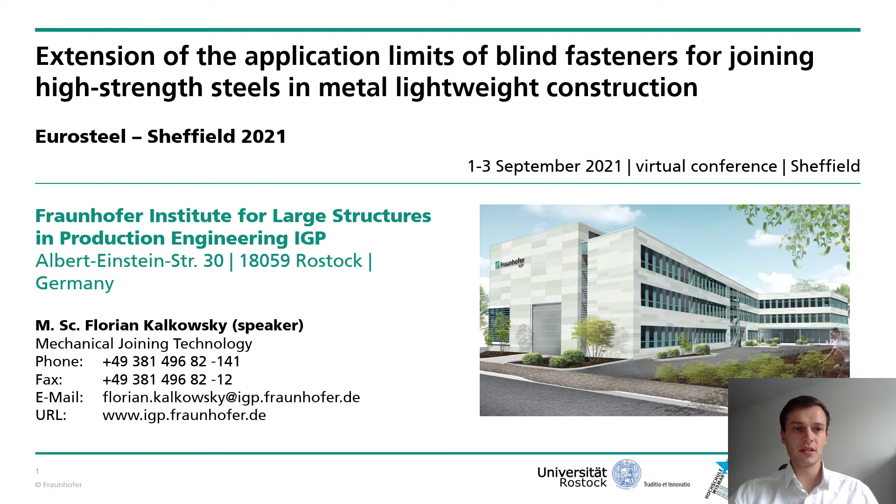First, let me introduce myself. My name is Florian Kalkowsky. I'm a member of the working group Mechanical Joining Technology at the Fraunhofer IGP Rostock, Germany. Today, I'm here to talk to you about the extension of the application limits of blind fasteners for joining high-strength steels in metal lightweight constructions.

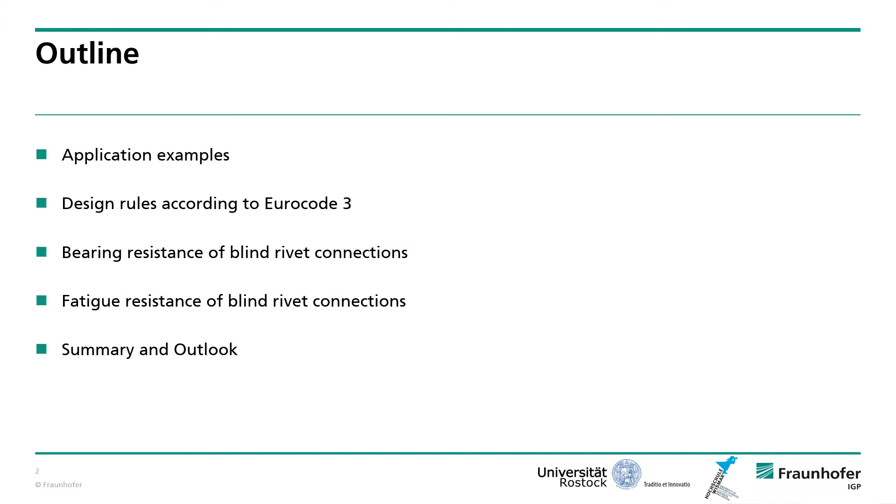During this presentation, I want to talk about the shown points. First, I want to start with some application examples, go on with the design rules according to the Eurocode 3, followed by latest research results from tests on blind rivet connections with high-strength steel to determine the bearing resistance and the fatigue resistance. And finally, I would like to give a summary and an outlook.

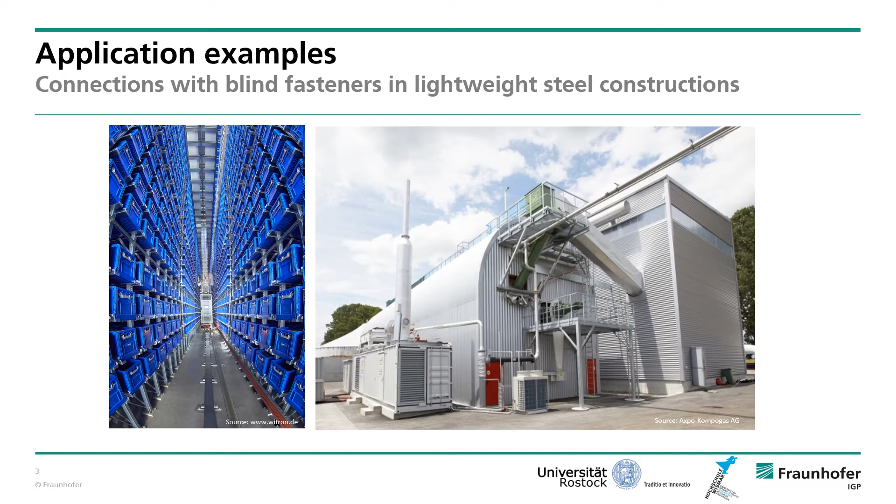And if we now look in a little bit more detail inside this construction, we can see that because of the used high-strength steel, we can realize small connection sizes, but with that fact, we have a problem with the static strength verification because it's not covered by the standard.

In addition, the equation to determine the bearing resistance is bound to additional limitations. For example, the components may only have a maximum tensile strength of 550 Newton per square millimeter. So this means that applications with high-strength steel fall outside this range. For the fatigue strength verification, it should be noted that there are no detail categories for blind fasteners and connections, and also the increasing material strength when using high-strength steel isn't considered in this verification.

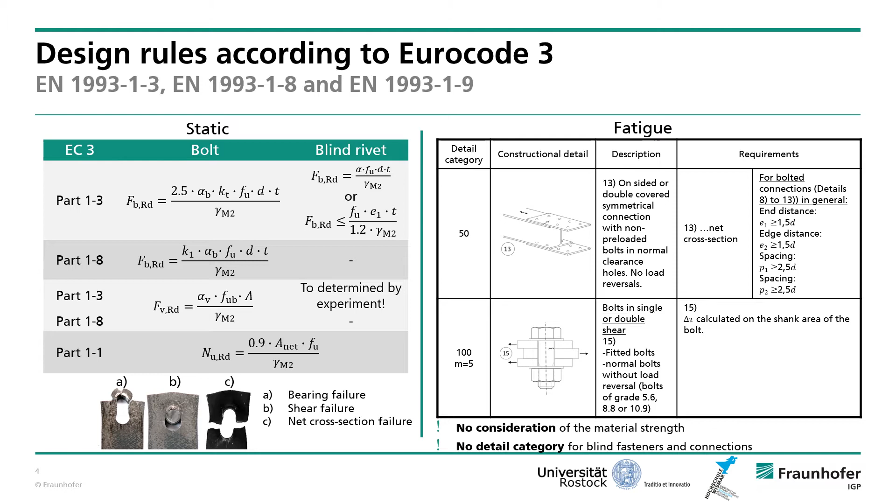The tested joints were single-lap and double-covered symmetrical joints where we used different steel grades of the sheet materials. The steel grades were S235 up to S700. For joining this sheet material, we used different types of blind fasteners. For the evaluation of the test results, we use the load bearing coefficient, which is the result of the maximum test load, the whole bearing area, and the observed ultimate strength.

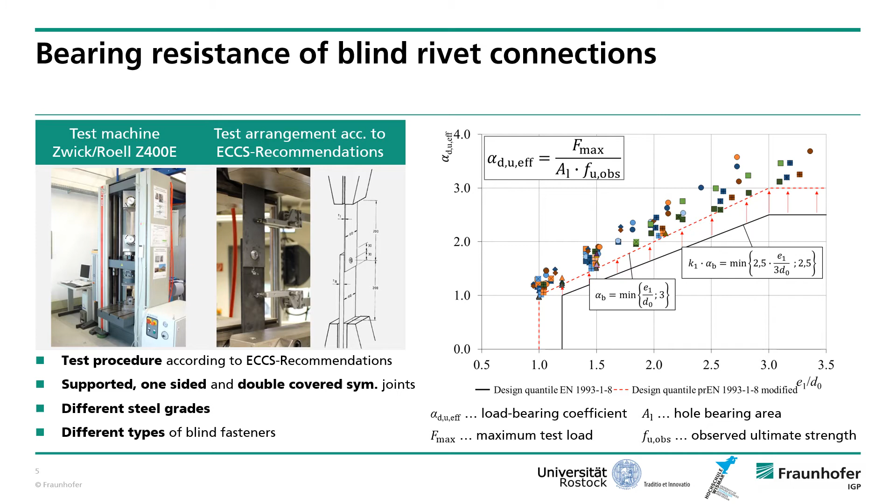And if we now compare this value of the load bearing coefficient with the design quantile according to the Eurocode 3 part 1-8, we can see all test results are above this design quantile, so we can sum up that the design rules for bolted joints or connections according to the Eurocode 3 part 1-8 are also applicable for blind rivet connections, in this case where we have a bearing failure of the sheet material.

Due to the missing detail category for blind rivet joints, we carried out fatigue tests to determine the detail category. As a reference, we used connections with a bolt where we have a detail category according to the Eurocode 3 part 1-9.

Furthermore, it was assumed that when we use high-strength steel for the sheet material inside the joints, we have an increasing fatigue resistance, which is currently not taken into account by the Eurocode 3. So this had to be proven by tests.

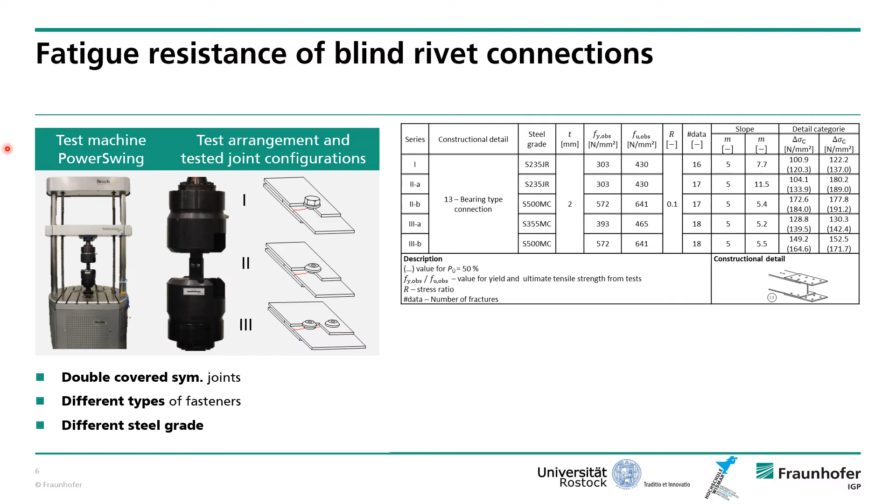If we now have a closer look at the test results and their S-N curves, we see there's a clear deviation of the fatigue resistance in our fatigue test, and the resistance value of the detail category was a value of 50, and also the slopes from the statistical evaluation deviate significantly in comparison to the normative slope with m equal to 3.

If we now compare the values of the detail categories between series 1 and 2, so the series where we use the bolt and the blind fastener inside the joint, we can see, okay, they have a similar fatigue resistance with a value from 100 to 104. And if we now use a high-strength steel inside the joint with blind fastener, the fatigue resistance increased from 104 to 172. So there is a direct link between the used material strengths and the fatigue resistance of the joint.

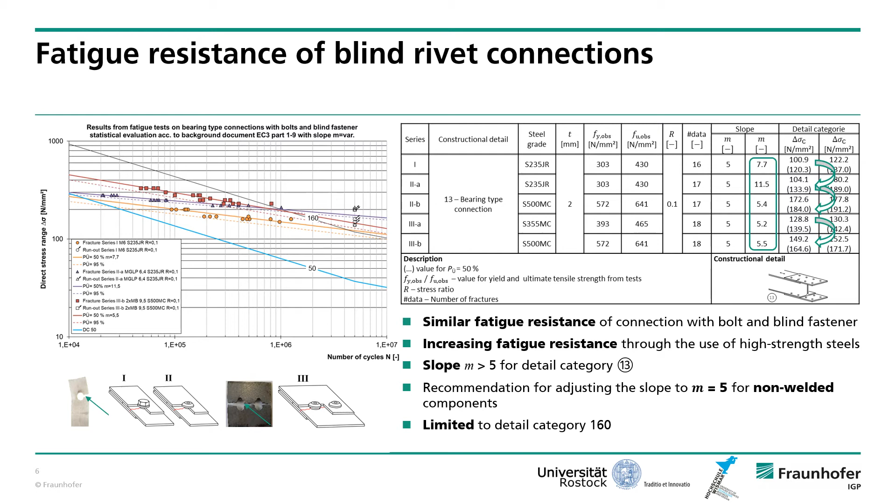And also for the configuration with 2 blind fasteners inside the joint, we can see there's an increasing fatigue resistance. As I already mentioned, the slope clearly deviates from the normative slope m equal to 3. So we recommend that for non-welded components, a constant slope of m equal to 5 should be used.

For the further evaluation of the results, the approach according to the FKM guideline was used. This FKM guideline allows to determine the fatigue resistance of a construction or a component with a synthetic Wöhler line approach. And this value from the FKM guideline can be converted into a detail category according to the Eurocode 3 by this shown equation. And for this approach, according to the FKM guideline, some input parameters are required.

For example, the SCF, a stress concentration factor, and we used numerical simulation to determine the stress concentration factor. And as you can see in the diagram, there is a linear relationship between the SCF and the geometric parameters of the joint. And with these input parameters, we determine the fatigue resistance according to the FKM approach.

And as you can see, the FKM guideline takes into account the increasing fatigue resistance when we use material of a higher strength. And if we now directly compare the detail categories from our test with the detail categories determined by the FKM guideline, we can see there is a really good conformity of experiment and the FKM guideline, and there are not really big deviations between the results, and so we think that this approach to determine the fatigue resistance of such joints is a really good thing.

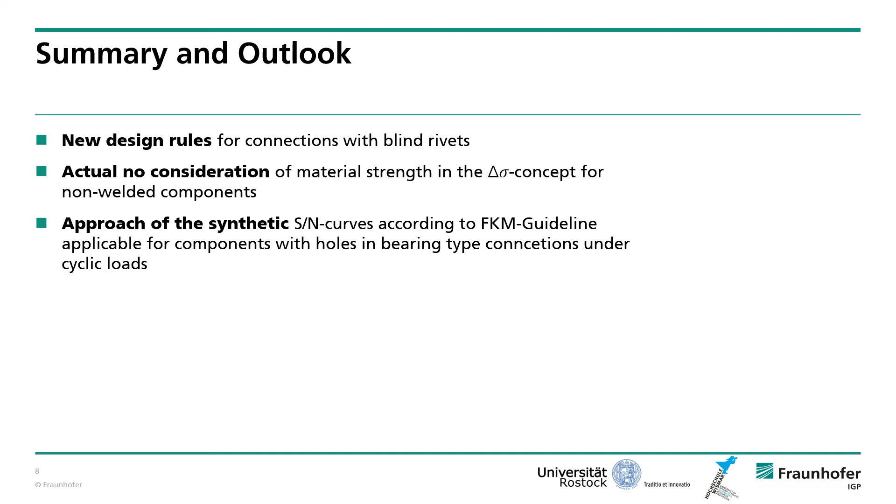Let me summarize again the things that have been shown. It was shown that the design rules for bearing type connection with bolts are also applicable to connections with blind rivets despite the use of high-strength steel. Also, by following the FKM guidelines, the fatigue strengths of the bearing type connections could be described very well, but transfer to steel construction is not possible without further ado.